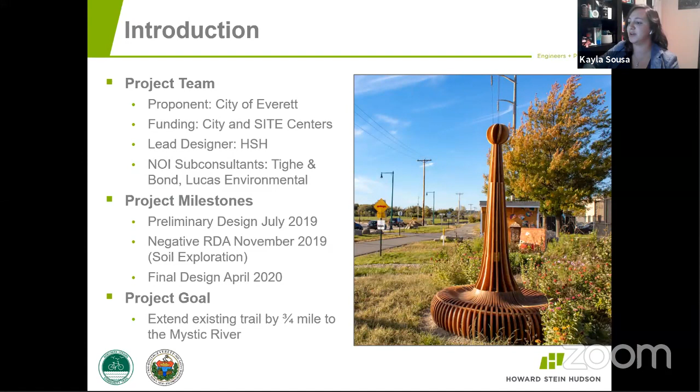So the project goal - there's a whole list of goals: accessibility, community network, et cetera. But generally, we're looking to extend the existing trail by three-quarters of a mile from where it ends to the Mystic River.

So just to orient, this is Google Maps with Everett highlighted. I don't know if you can see my mouse too? Doesn't seem like it, but I see the mouse anyhow. Oh great, okay, so Everett.

I just turned on biking so you can see where the existing trail is traveling through Malden, and then the part of it that's in Everett today. And this is where we're looking to extend it.

So just zooming in on the project area. The little star is where it ends at West and Wellington. And then the parts of the project area that we've had to balance with - we're going under Route 16, MassDOT-owned bridges, under two of them.

We travel through and around the MBTA ballast yard, where they keep their stone to service the commuter rail, the Newburyport-Rockport line. And then, of course, we have Gateway Shopping Center Plaza with Target and Costco and Home Depot and all those stores everyone knows up here.

And then across the tracks, we have Encore Casino. At the time this graphic was made, this was a proposed trail - of course it has been built. So here's our project area.

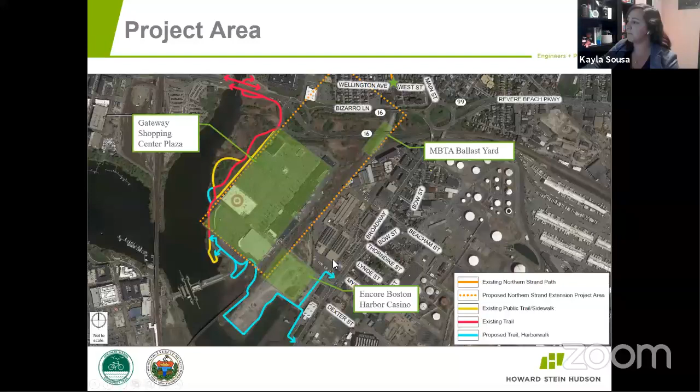So this is the existing terminus, just a picture. This is where the trail ends today, and we're looking down towards the extension at the first bridge.

Some design considerations - I wanted to include some photos so we could visualize what the path looks like. When the shopping center was built, the intention was for the path to be right at the back of it. So for a good amount of our project, we have this nice leveled off shelf here. That's where our proposed alignment ended up being, which allows us to keep a safe distance from the commuter rail, which you can see next to Encore over here.

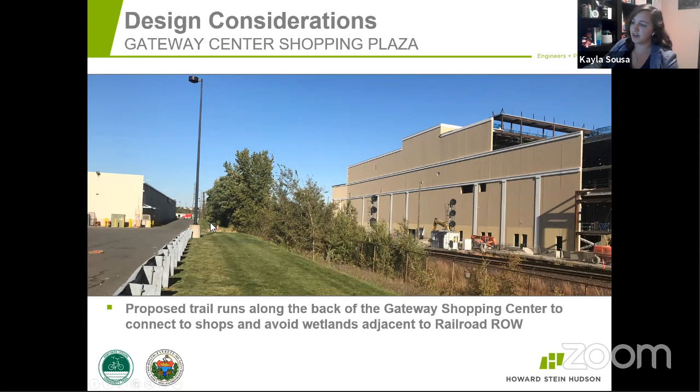And then there's actually quite a bit of wetlands that sort of are flat against the commuter rail line. So this is where you can kind of picture the path, and that gives people access to stores too, which is great. So here's the MBTA ballast storage yard.

This was one of the restrictions that caused us to have maybe a little more wetland impacts than we all would have liked. We negotiated pretty hard with MBTA to get some of this space here so that we can go through this bridge safely, but we couldn't take up all of their rail.

So once we get out of this bridge, the first bridge, we have to shift over and get off of MBTA right away. And the city of Everett is paying for a rail design so that this track can get merged with this first track, which we're not touching, so that they can keep their operations.

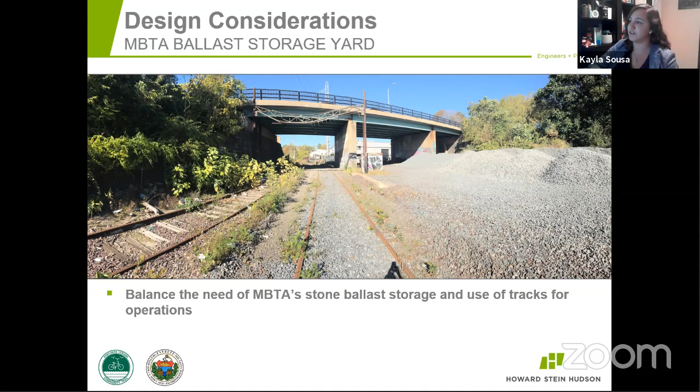Really important - MBTA is always fighting for space, and we can get our path through. And then, of course, the reason we're here today - identifying the wetlands in this area and then all the other environmental resource areas.

And then as long as we can, we stay up on the SITE Centers shelf, and then we connect to the Encore River Walk.

Is that about a half a mile? Is that the entire length of what you're doing? It's about 3/4 of a mile. Yes, 3/4. Very difficult, expensive 3/4 mile trail that's really important because it's connecting this Encore River Walk and then all the DCR paths as well to the existing Northern Strand Trail.

With the intention that one day this builds to Boston. So as far as project goals go, this would let people bypass Sweetser Circle and some of the unsafe conditions on Broadway, and they would be off-road for all of this.

When do you plan to start this project? This is almost our last hurdle. I think we have everything we need from DCR as far as access permits, and the MBTA is ongoing. Once we have - I think we're just amending a lease agreement, and maybe Jay has more of a timeline from there - but we were hoping to bid within the next month to start bidding. And then the contractors could do what they could this fall to get ready and then do most of their construction next year. But it will go into 2022.

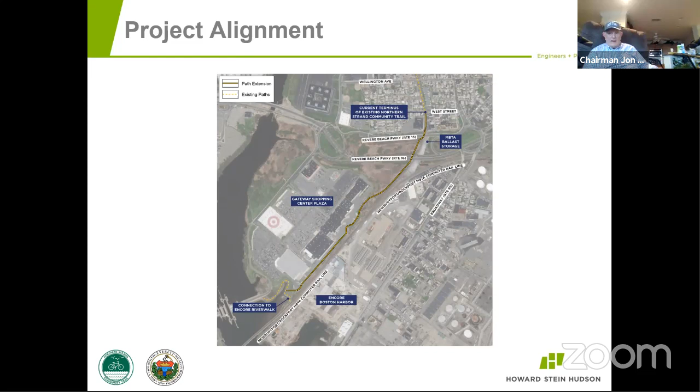That I can think we were hoping, from reading it, it's very long what you've been going through there. It was very well done, the notice of intent. Thank you.

It's a standard notice of intent. We have the Wetlands Protection Act form and narrative that goes through existing conditions and what we're proposing, plus all the attachments: figures identifying the areas, site photos, our wetland scientists who delineated the wetlands at the beginning of the project, the permit drawings, Tighe & Bond's existing tree survey, and the wetland replication plan report. HSH did the stormwater memo, and Chris Lucas performed the wildlife habitat evaluation. That's what you'll find in the attachments, which is why it's such a robust document.

So if there's anything I don't go over in these next few slides, we can open that up and I can continue sharing my screen.

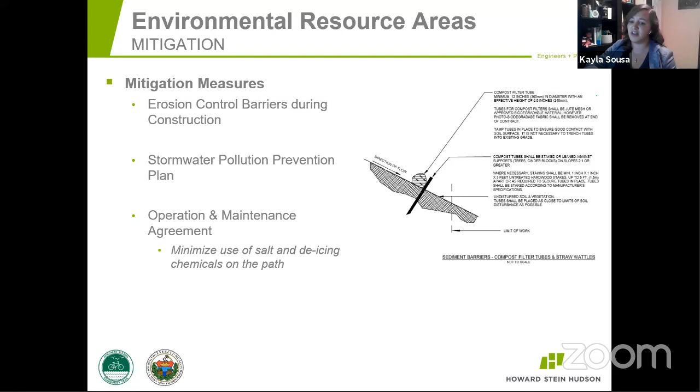Through design, we tried to mitigate the effects as well. We tried to do minimal fill in the flood area, just do what we had to do to tie into the path, basically nothing else. We used these timber rail fences to allow wildlife movement in case there was wildlife found out there. In the evaluation, it was found that our project had no adverse effects on wildlife in the area, so that was good.

The boardwalk construction is one of the bigger ways that we're mitigating, I think, and we'll have a slide on that just showing what the boardwalk's going to look like. Then, because there were impacts that we could not avoid, we're doing wetland replication at a ratio greater than 1:1. We tried to place that in areas where it would have unrestricted hydraulic connection to the same water body that's associated with what was lost.

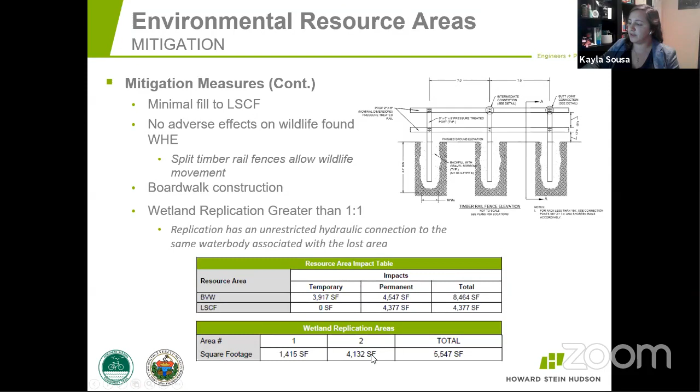So this is our table of overall impacts to the resource areas. And then there's two wetland replication areas that we'll zoom in on, and I'll pass those along to Amanda.

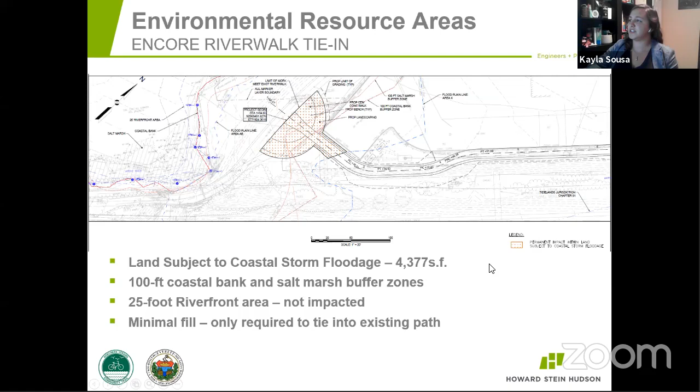So that's this page. Just to jump around a little bit, I'm gonna zoom into the corner where we've been traveling along the railroad right of way, and then we jump up to be up at the shopping center. You can see the contours. There's a gap between the higher elevations where if we were to just continue this path and fill, our fill would have been huge. It would have been filling in this wetland and also discontinuing its hydraulic connection. So in this area, we're actually going to build a boardwalk to avoid major impacts to the wetlands.

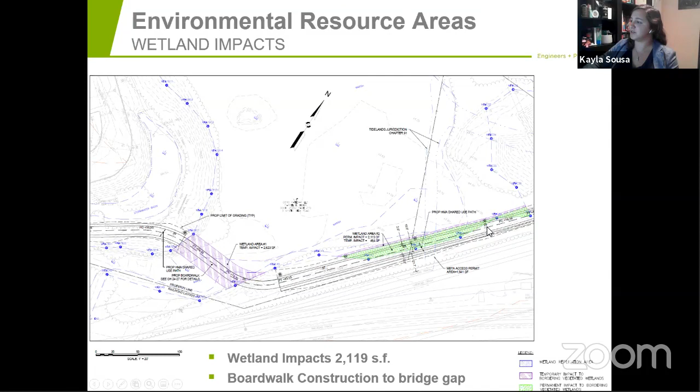So this is where the boardwalk comes in. These are some of the wetlands that were really difficult to avoid. We have to keep a certain minimum offset from the railroad tracks, and keeping that while trying to follow the existing grade as well as we could because we're approaching a bridge here, this is what we did. So these wetland impacts are just over 2,000 square feet.

This is the inspiration for the boardwalk, I guess—there's a boardwalk used on a similar shared use path in Fall River. And this is the one our structural engineer designed, 14 feet wide, pile driven, because it's quite elevated as it bridges the gap. This is what we did the boring for, was for this boardwalk.

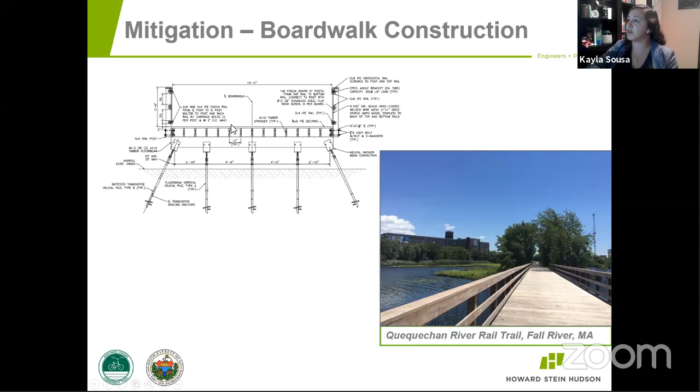So I can keep sharing my screen, but Amanda, I don't know if you want to jump in. The next two slides are the wetland replication slides.

For the record, I'm Amanda Houle, Senior Wetland Scientist with Tighe and Bond. We can take a quick look—we'll go to replication area one first, Kayla. I think that would make sense.

As Kayla mentioned, we are proposing approximately 4,400 square feet of impacts to wetlands. We will be replicating at a greater than 1:1 ratio. The existing wetland areas that are going to be impacted are palustrine emergent marshes. They're not forested wetlands, not shrub wetlands—they're mostly Phragmites-dominant, invasive, colonized wetlands. So we are proposing to create wetland replication area 1. This area is adjacent to an existing wetland in accordance with DEP wetland replication guidelines. The goal is to have that unrestricted connection to an existing wetland to really help encourage the success, longevity, and establishment of this as a functioning wetland well into the future.

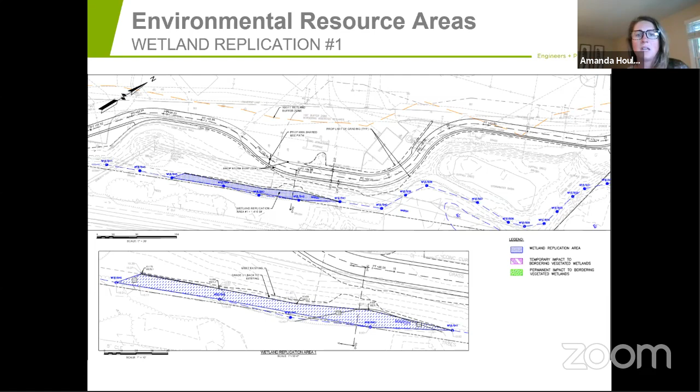So we are proposing this small area to be excavated to a grade that's consistent with the grade of the adjacent wetland, and it will be vegetated with a variety of native herbaceous species. The intent is to be an open herbaceous marsh to mimic the wetland area being impacted, because another goal of the replication guidelines is to replace a similar function and community structure to that which was lost.

Here's the planting schedule. We're proposing things such as steeple bush, big blue stem, butterfly milkweed, a few goldenrods, blue vervain, soft rush, coneflower. So it's a nice variety of species, and this will be overseeded with New England wet mix - really nice flowering plants that'll provide a lot of wildlife habitat value as well. It's a pretty simple area.

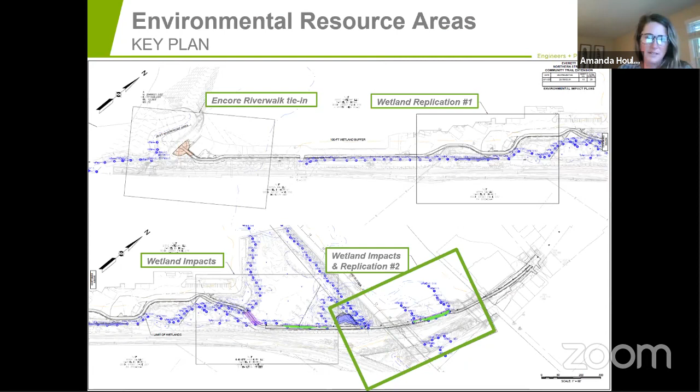Wetland replication area 2 has a little more going on in it. The intent of this wetland replication area is to create more of a scrub shrub wetland rather than an emergent marsh. In this area, we are tying it into an adjacent channelized wetland that runs along the base of Route 16. We have identified the grade of that wetland and established the grades of the replication area to be consistent with where we were seeing connections with groundwater and other hydric and wetland indicator conditions, to help ensure the success of this area.

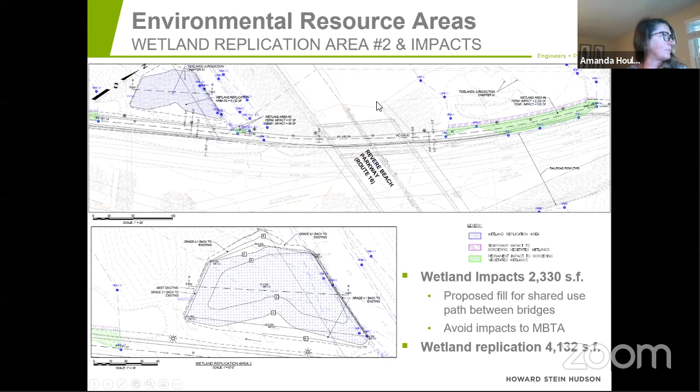In this wetland we're proposing more woody shrubs and a few tree species. As far as trees, we're looking at putting in a few box elder, and we'll be installing a number of shrubs including speckled alder, northern arrowwood, elderberry - a wonderful fruiting shrub for wildlife - silky dogwood, chokeberry, which has really great fruit and mast properties for wildlife, and sweet pepper bush.

Then we move into a variety of herbaceous species similar to what you'll see in replication area 1, such as milkweeds, goldenrods, and rushes. It should be a really nice variety of species to create a varied habitat. To that end, the wetland areas being lost are monocultures of Phragmites, so it's our hope with these designs that we're creating an enhanced wetland system through a varied community structure with a variation of plants.

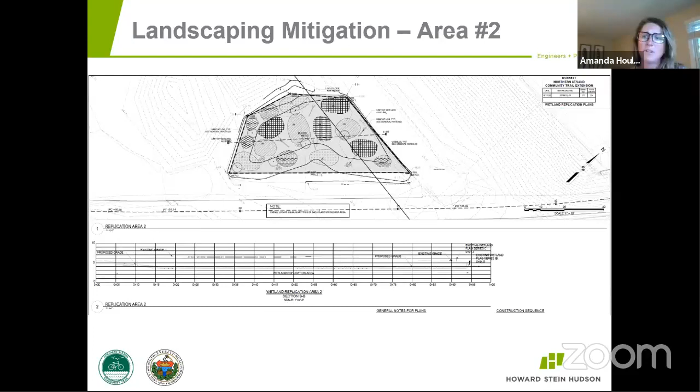I'll also speak to the chairman's question on the trees - let me open up the tree survey. Tighe and Bond wetland scientists did a tree survey of the entire project corridor. This survey spanned probably 30 feet to either side of the center line of the trail, so it should encompass the entire limit of work and probably then some. We considered a tree to be anything 4 inches diameter at breast height or greater.

Under that construct, we found 314 trees. The majority of these trees were all invasive - mostly tree of heaven, a little bit of quaking aspen, and a few populations of black locust, also an invasive species. We didn't really see much in the form of native trees. In our wetland replication areas, within your jurisdiction, we are proposing to remove 33 trees of the 314 surveyed. Under the replication plan, 6 will be planted. But the intent of these replication areas is to construct more of an emergent marsh and shrub community to provide a little more variety of habitat.

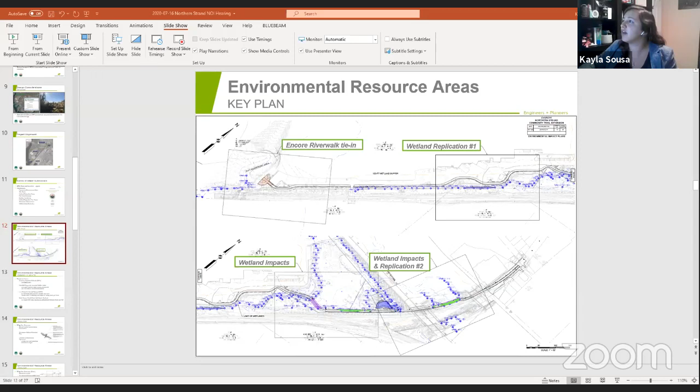I think you have to reshare the different window, because we still see the PowerPoint. You're seeing the PowerPoint? Yeah, you have to switch it over in Zoom. I think you have to go and reshare, unshare and then reshare. Okay, I have two screens, so that probably makes it complicated. Me too.

Okay, so these should be our construction plans now. Yep, that's it. These weren't showing before because I only had the replication plans open. Wherever there was a wetland adjacent to our work, we're calling out these sediment control barriers, which is much of the project. You can see it tying into some retaining walls, but generally following our limit of grading. That's just the detail that was on the construction sheet.

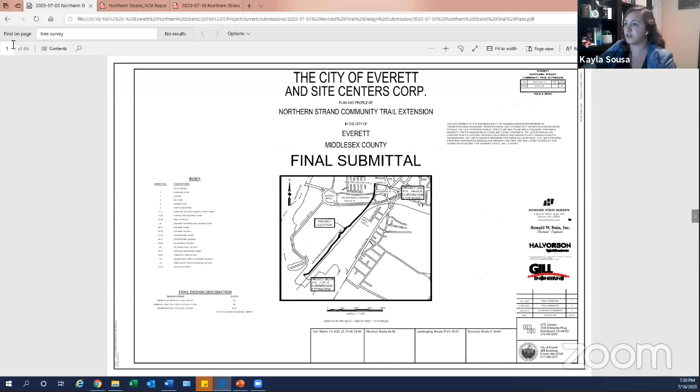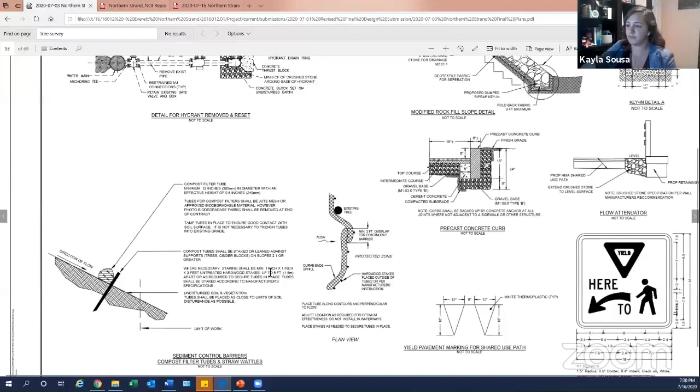Pretty standard, I think, for protecting the areas. Do you have a laydown area construction-wise, and where is it relative to the project, and do you have any protections or proposals regarding material that gets stockpiled or otherwise?

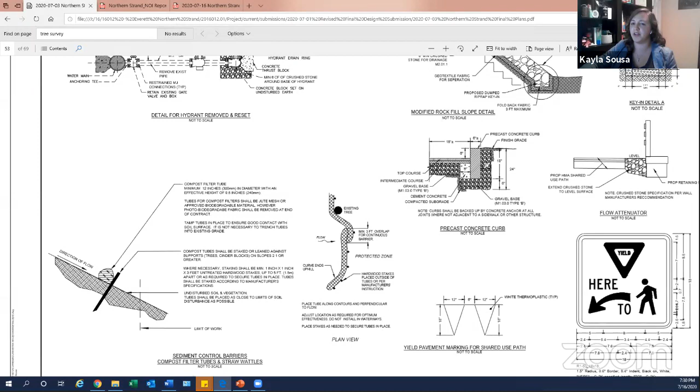They'll be following a health and safety plan during construction. We don't have our contractor yet, but I think they'll have to be following the stormwater pollution prevention plan. Typically what we do is help the contractor out, and we'll generally produce a plan we can give to the Conservation Commission to show where the laydown area and stockpile areas are, so that will be part of the stormwater pollution prevention control. If the commission's okay with that, that's the way we usually do it. We wait to get a contractor on board so we know where to put in everything, whether it's trailers, stockpile areas and whatnot. That comes later, we need them on board because I think they usually have input on that plan. If the commission's comfortable with having that be a condition, that's the way we usually do it.

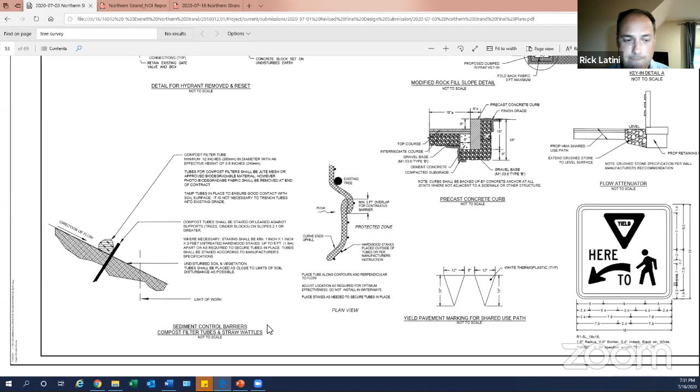On the tree survey, you mentioned the invasive trees that are there. Is there a picture, just for my information, of what was the first tree you mentioned, the majority that's there? That's the tree of heaven. We didn't prepare a photo log to accompany that, but I could certainly provide the commission with photographs, or if Kayla wants to Google it really quickly. I'm Googling it, I think I know what it's going to look like, but I'd just never heard the name of it.

Yeah, it has the compound pinnate leaves, exactly like that. It's a clonal tree too, so it sends up runners and shoots, and you'll see them in colonies and clusters, so it's pretty common in urban areas with the soils present there. These are not native trees to Massachusetts. This tree came in from somewhere in Asia, and I think it was introduced in ship ballast or something, plant segments came over and it became established.

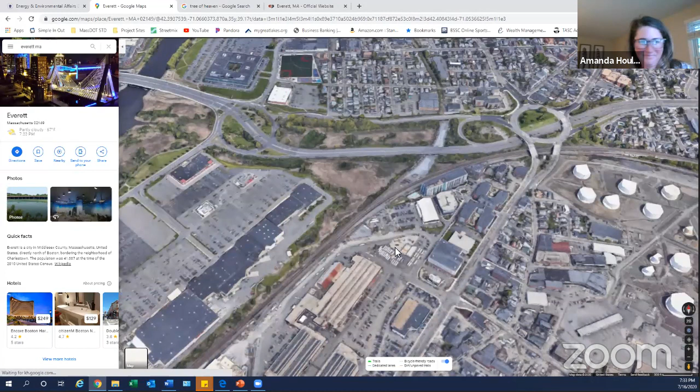Well, let me tell you this, a number of years ago when I had to have allergy injections, one of my injections was for the 17 trees that are normal in Massachusetts, that's what they gave them for me. So these are not trees that are normal in Massachusetts. Well, this one's tree of heaven, so we know where that came from.

I wrote down a question about the hope for the replication area to survive not being overrun by the Phragmites. Obviously you're putting a wide range of different plants in there hoping a couple or all of them will hold back the Phragmites. Is there any plan for monitoring and maintaining this, since you're installing a pristine wetland area?

As part of the notice of intent, we submitted under separate cover a wetland replication plan, which is what Kayla is scrolling through right now. This was developed in accordance with the DEP wetland replication standards and guidelines, a pretty hefty document, and you have to check off a lot of items to document that you're conforming to their best practices for design. Part of that is a pretty rigorous monitoring plan after creating these areas.

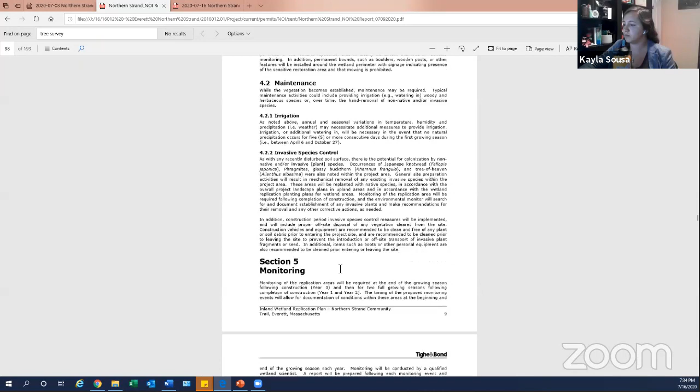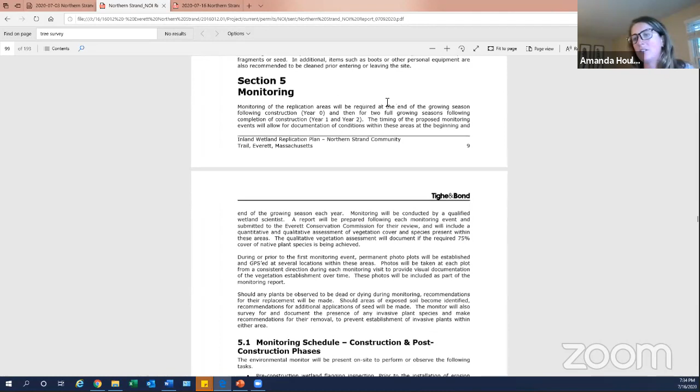So we're proposing up to 3 years of monitoring. Following completion of construction, a qualified wetland scientist will go out, document the area, establish photo plots and other sampling locations, and gather baseline data. Then they'll go back out twice a year for 2 more growing seasons to continue documenting these areas. If they notice any plants are dead or dying, recommendations will be made for suitable replacements.

In addition, if any invasive species are documented entering the area, the monitor will coordinate with the city to develop a plan and recommendations for their removal. These reports will be provided to the commission on an annual basis as part of this proposal for your review and consideration.

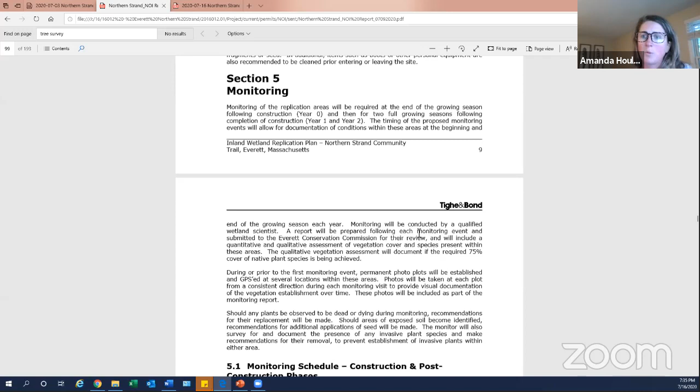How successful is it when you install a replication area like this — can it trump the invasives, or is it only a matter of time? If everything is done for the first 3 years, and then following those 3 years, if it's left back to nature with no help, is it most likely the invasives would take over? It could be very rigorous to try and protect, especially because the area is obviously surrounded by Phragmites.

Yes, I certainly understand your point and where you're coming from. I can't make an assurance either way that after 3 years this will stay completely native or not. With this design, the planting density, overseeding, and the species we've selected, they're pretty quick to establish. They can grow at really good densities to help give this native community an edge against the Phragmites.

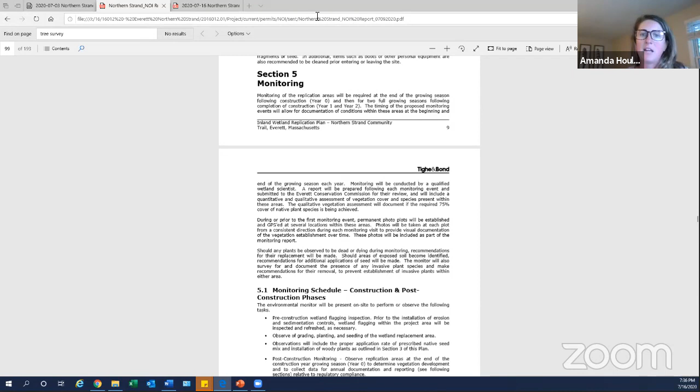Kayla and I had discussions about this, but managing invasives just goes down a rabbit hole with really no end once you start looking at the Phragmites adjacent to this. An option I've seen on some projects for wetland replication areas, which some communities have had success with, is installation of a root barrier — a vertical structure along the edge of a replication area adjacent to Phragmites. It's pretty inexpensive. It's not part of our design right now, but it's something the city could consider later if they started seeing a lot of encroachment and couldn't keep beating it back annually.

I was wondering, as a question for Jay — putting these replication areas in, they're there to encourage some animals, and besides the plants, I think the encouragement is also to get some wildlife down there too. So these would ultimately be an island among the Phragmites, but they might be a nice viewing area off the path. Independent of this notice of intent, I'm not saying I'd have it as part of our order of conditions, but it would be nice if the city were willing to put extra effort into this, because it's almost going to be like a park.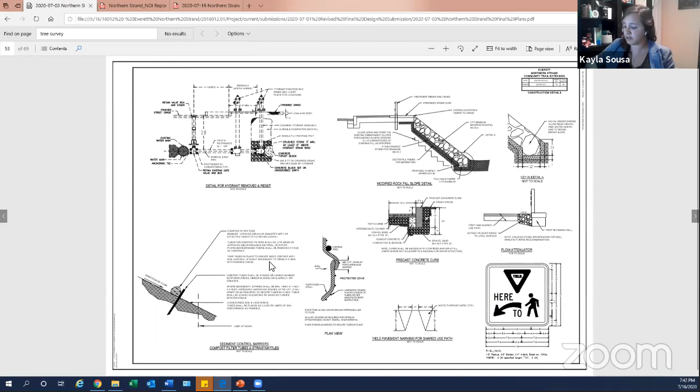And I could say my final question, but I'll probably come up with another one. It would appear that the boardwalk is being designed in pressure treated timber. Is that correct? Yeah, I think that's correct. Was there any thought—because I currently have a project on my radar using HDPE—

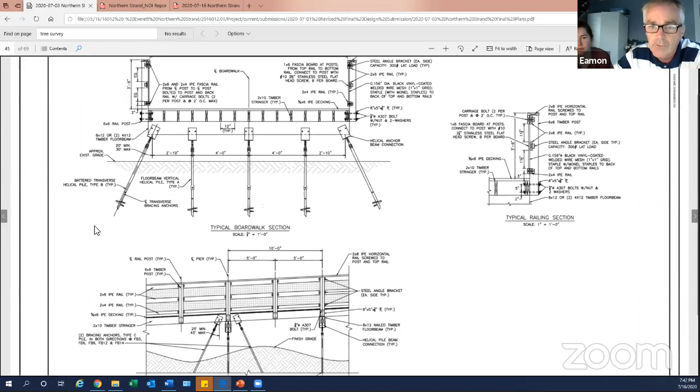I know when you decide to use HDPE, the cost of materials is 2 to 2.5 times the cost of pressure treated timber. Was any thought given to that in regards to maintenance? I mean, I know that would be a city decision, but

I just wonder if it was thought of and somebody decided one way or the other. I actually think that was a question brought up by DCR in the review, or maybe the peer reviewer. So I can pull up what the structural engineer came back with, but I vaguely remember there being consideration for that type of material. I might have to get back to you on it though.

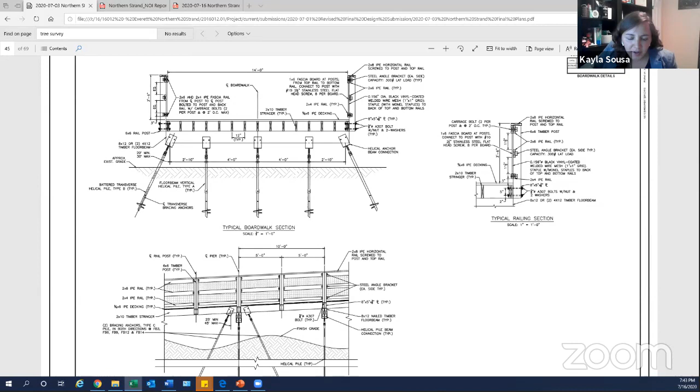Yeah, I think they had thought about HDPE and there were some references to it, but in the end, due to cost, and also because there's going to be a grace water and ice shield applied to all the stringers and everything, similar to what they use for roofing, this treatment is typically enough as long as the stringers aren't exposed to a continuous wet and dry cycle. So in their experience, this has been enough for this type of application.

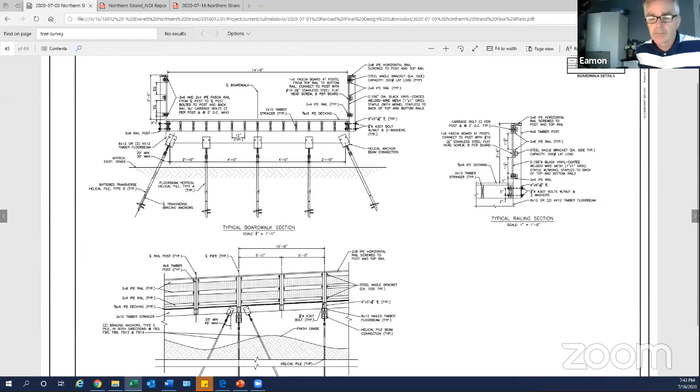Would agreements around care and maintenance and replacement of timber on the boardwalk be part of that? Be part of the agreement?

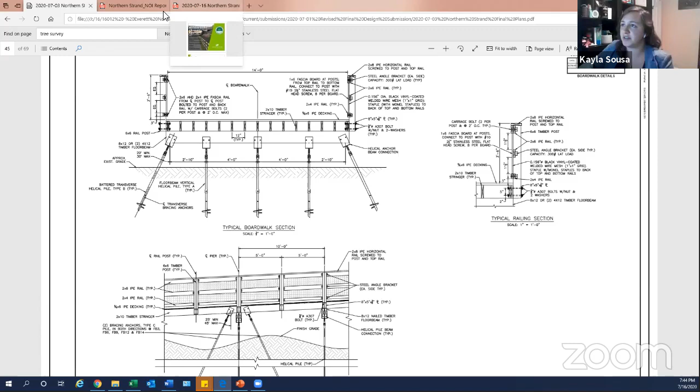Actually, Kayla, this is on DCR's side, right? I'm not DCR, sorry, Site Centers—yeah, there's actually, site. So I think they would be responsible for long-term maintenance on it. Okay. Yeah, the property line is right here, actually. So the boardwalk is all Site Centers.

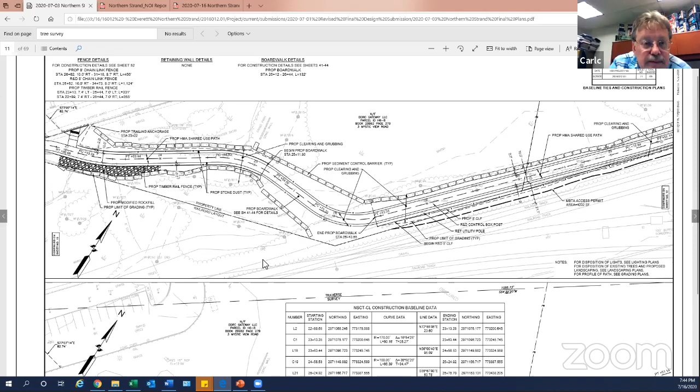So Rick, without the DEP number, what is usually the next step? Not that this is usual, but it's up to the commission if they want to approve the project as is. They just won't be able to issue the order of conditions officially till we give them the DEP file number. But you still have to vote on it, I believe. So you have to keep after them to get the file number.

You have to call them every day, push them to get it. Will do, otherwise it hasn't been much help, they're slow. I was told it's still going to be that small office, so that's what I found in the past.

You've got to keep after them to get the file number, because you can't go ahead without the file number. Jay, Kurt's been really good, and he already emailed him. There is no filing fee, because it's a community in Massachusetts, so there is no filing fee for the city of Everett.

Correct, we submitted the fee and paid for the legal notices on June 26th. Which normally the city does not pay for, the applicant does, but since the applicant is the city of Everett.